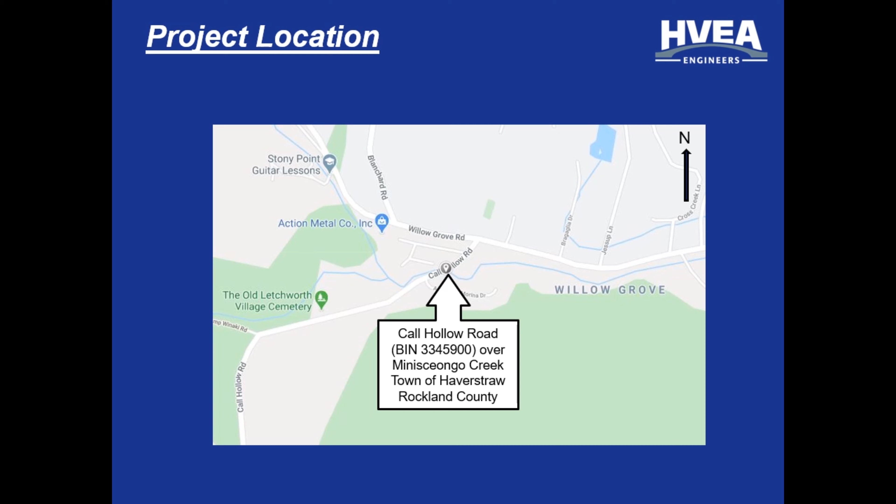As noted earlier, this bridge is located on Call Hollow Road between Anthony Marina Drive and Willow Grove Road. Here is a view of Call Hollow Road looking east toward Willow Grove Road. The bridge is located between the red lines under the roadway surface. Note the temporary concrete barrier that is protecting vehicles from the steep slope behind it. This barrier was added when the slope gave way and the existing guide rail collapsed.

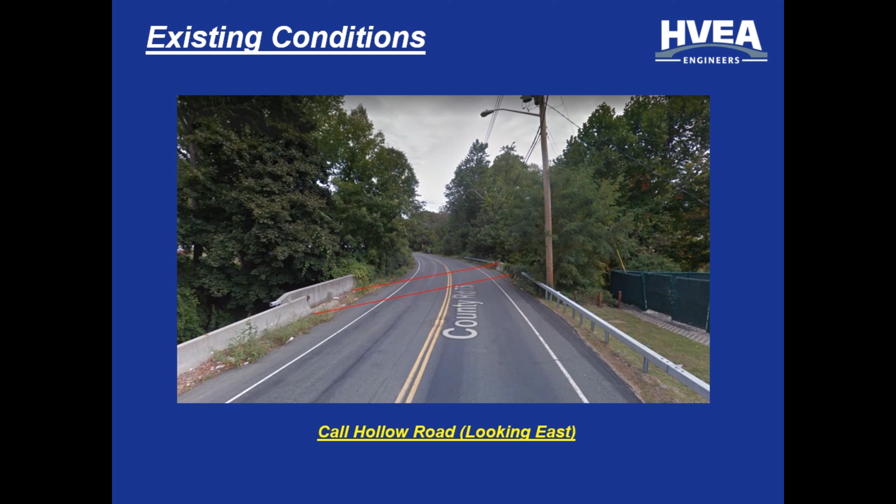Here is a view behind the temporary concrete barrier of the existing slope down to the creek.

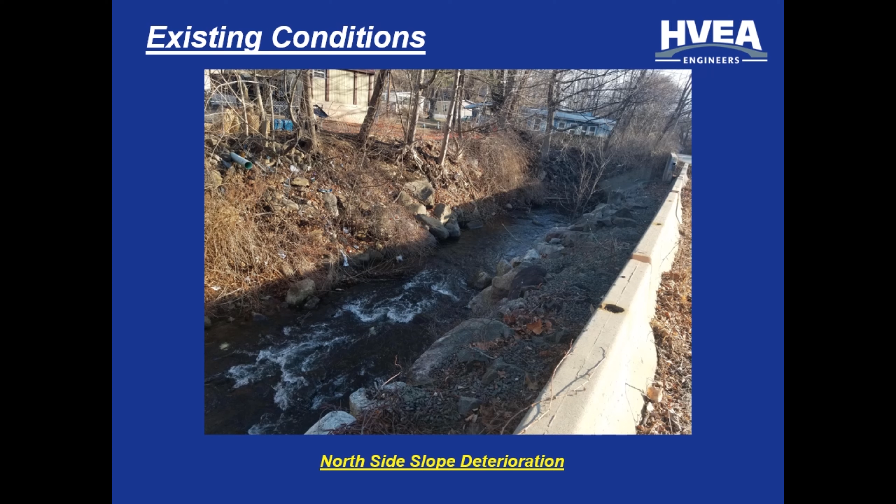Here is a view of the bridge on its north side, where water enters and crosses under Call Hollow Road. Silt and debris have collected in the first span over time. On a given day, water primarily flows through the second span until the water level reaches high enough to cross through the first span.

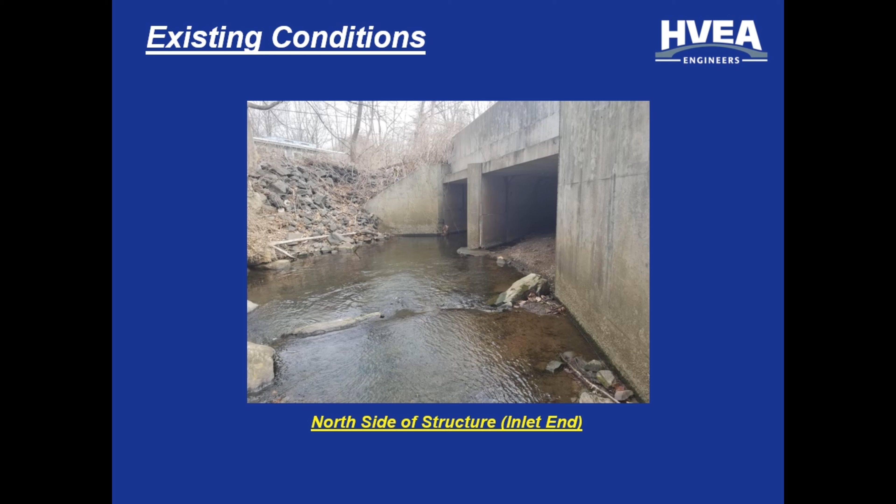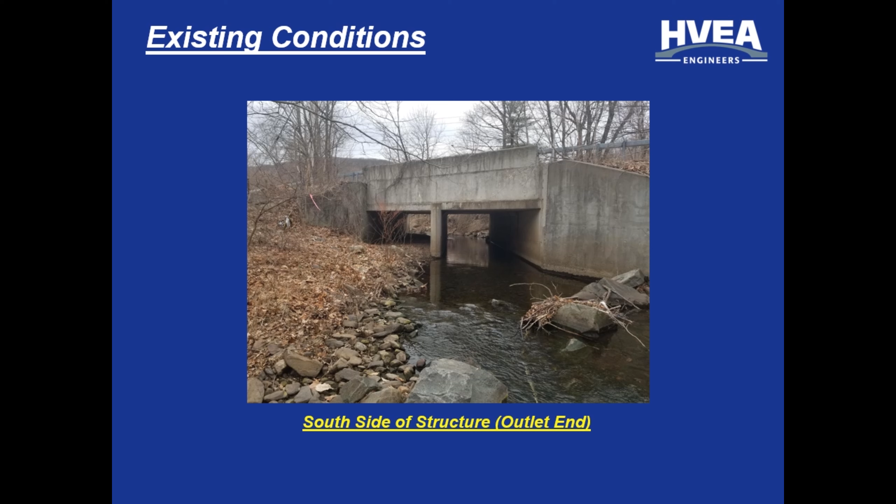Here is a view of the bridge on its south side, where water exits the bridge and continues on its way. You can better view the silt and debris that have collected in the first span from this vantage point.

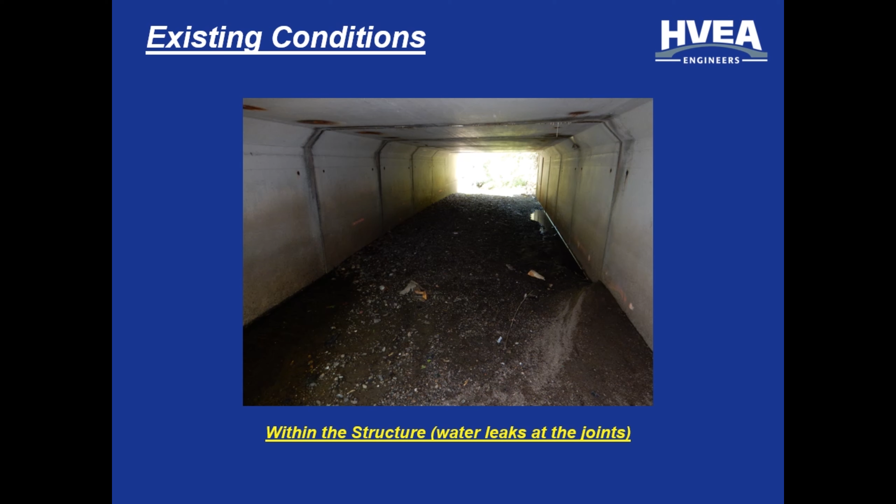Here is a view inside the structure. Note the water leakage at each joint in the structure. Here is a close-up view of typical concrete deterioration and exposed corroding reinforcement due to water leakage at the joints.

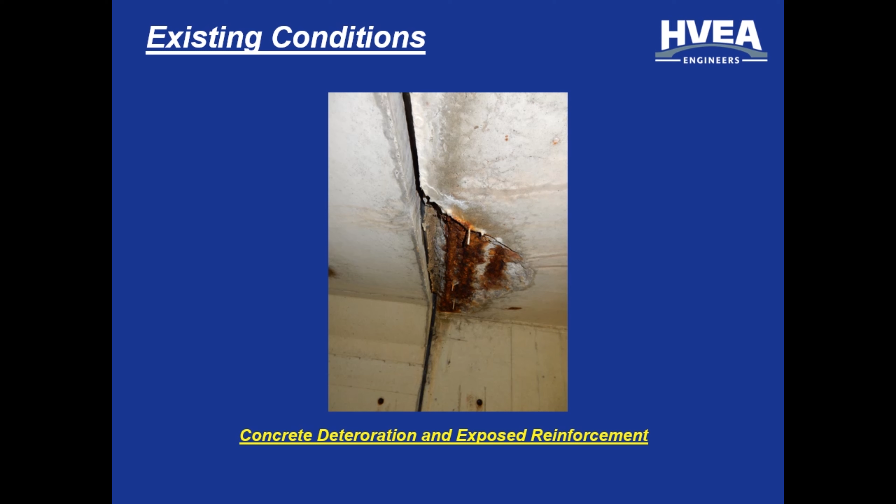This project came to be when the Rockland County Highway Department determined that the existing bridge is exhibiting signs of deterioration that require repair efforts beyond the capabilities of county maintenance forces. The bridge rates a 5 out of 7 overall per New York State guidelines. However, there are clear areas of concern, including spalling, exposed rebar, cracking and efflorescence, which indicates water leakage.

In addition, the northern slope along Call Hollow Road has been eroding away over time during large storm events. As noted earlier, the slope eventually gave way and the guide rail protecting vehicles collapsed. This required the county to install a temporary concrete barrier to protect the drop-off close to the edge of the roadway. This condition will be remedied with the installation of permanent wall and new guide rail.

The county applied for funding to rehabilitate the bridge and install a new wall through the Bridge New York program and received $808,051. Bridge New York is an initiative that is overseen by New York State DOT to provide municipalities with much-needed funding to repair or replace critical culverts and bridges. As a result of receiving Bridge New York funding, the project must adhere to all New York State DOT specifications and design manuals.

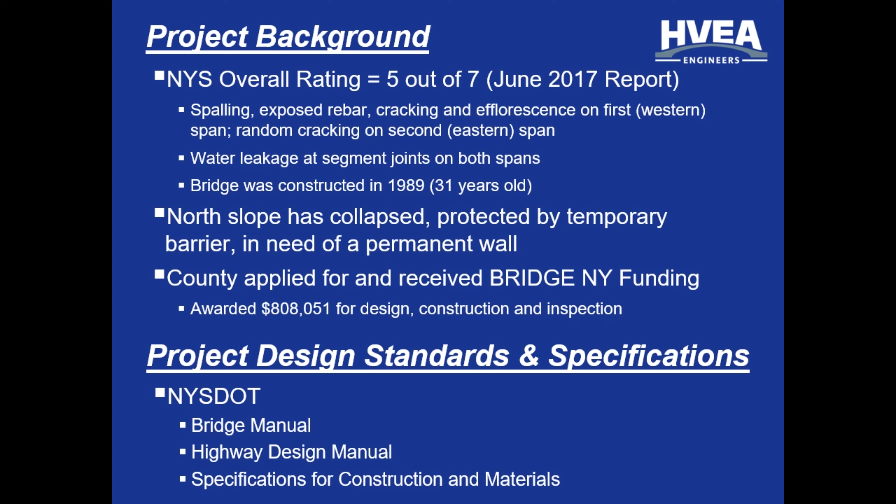The intention of the project is to rehabilitate the bridge in a cost-effective and timely manner. This will include removing and replacing the existing asphalt over the bridge, installing new waterproofing, repairing all joints, performing rebar and concrete repairs. The project will replace the eroding north slope with a permanent wall resistant to the effects of scour and undermining.

The project will reduce future maintenance and repair costs. Guide rail will be installed following the installation of the new wall to protect the traveling public.

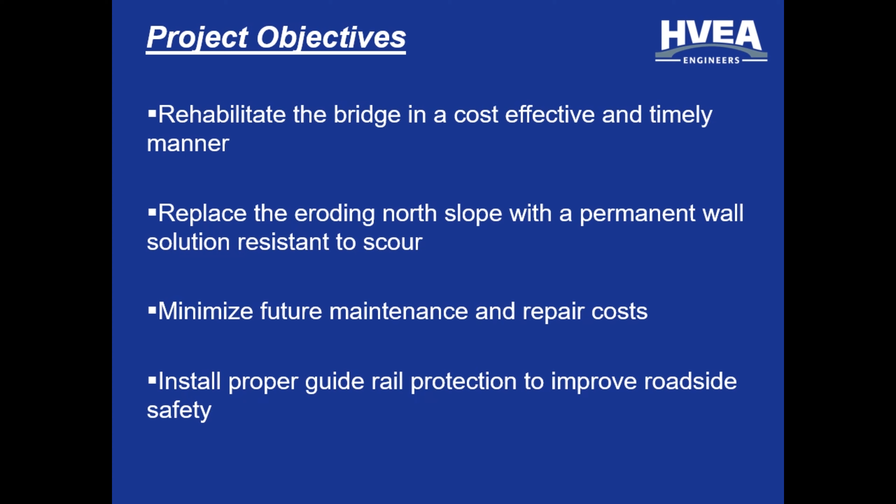The biggest challenge will be to complete the project in a timely fashion in order to minimize disruption to the residents and commuters that use Call Hollow Road every day. The most effective means of maintaining and protecting traffic will be to utilize a temporary signal that allows for one lane at a time to cross the bridge.

This condition will be in effect for a duration of approximately 3 to 4 months. Traffic will be on the south side of the road at first, then switch to the north side.

In order to properly install a new wall along the north slope, it will be necessary to excavate nearly half of the roadway down to the water level. This will allow for a stable foundation to be built below the water level to resist scour and undermining.

New clean fill will then be installed behind the wall, followed by a new pavement structure. The roadway will be protected with concrete barrier during these operations. It is also important to identify impacts to utilities early in design to avoid conflicts and delays during construction.

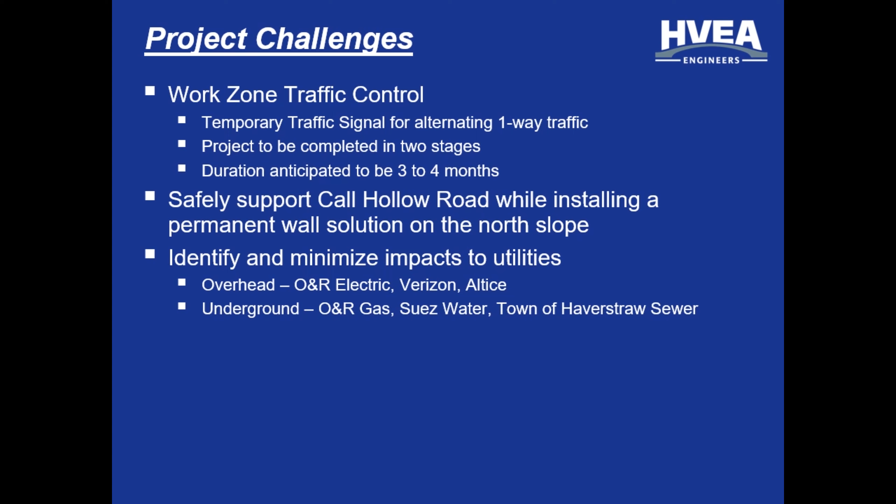HVEA is coordinating with all the listed agencies. To date, HVEA has performed several preliminary design tasks, from a topography survey to gathering existing utility information and soil properties. We have also performed environmental and cultural investigations to satisfy New York State DOT requirements.

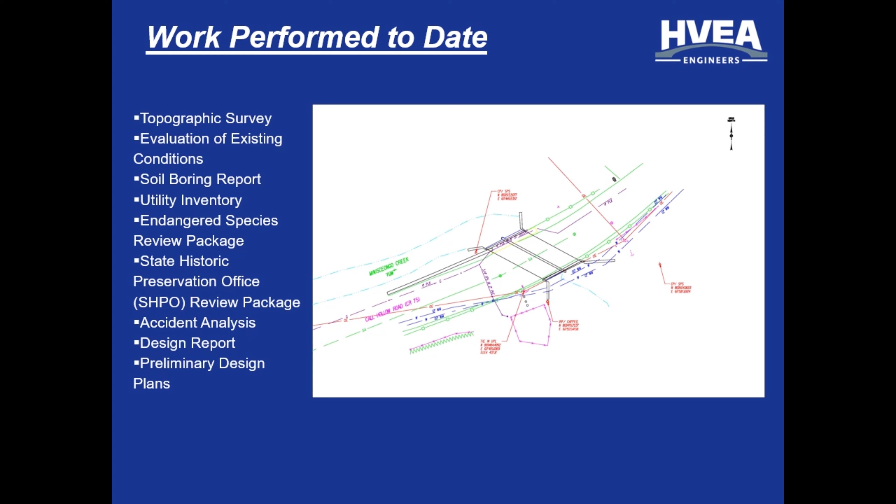All information has been gathered to form a design report. The most current version of the report may be viewed on our website, hveapc.com, from the link labeled Call Hollow Road Design Report.

Here is an excerpt from the plans of the bridge rehabilitation and new wall installation. The bridge is to the right of center on the slide. The new wall location can be seen as indicated in red.

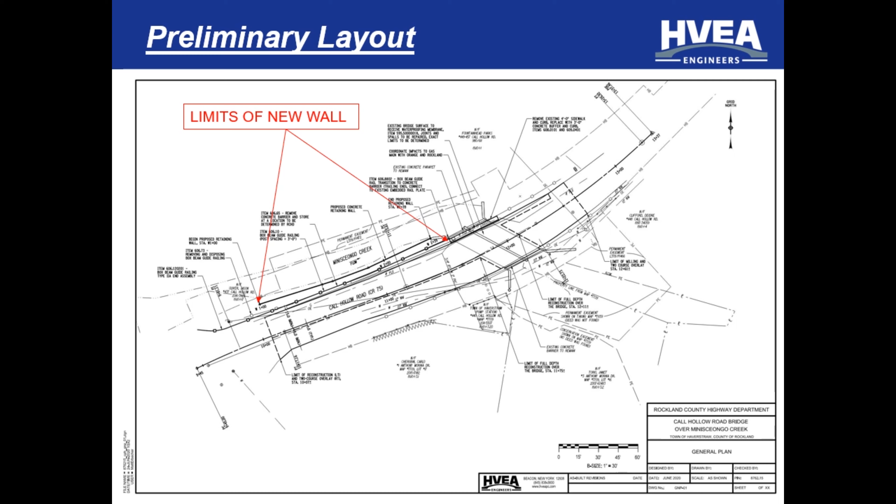In 2014, just over 2,000 cars used the road per day on average. This data is consistent with current day conditions.

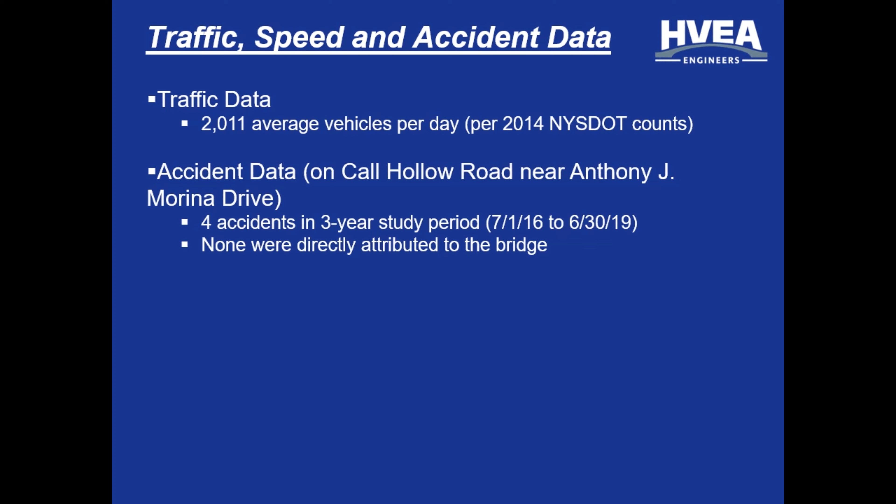We also obtained all available police accident reports in the vicinity of the project for a recent 3-year period to see if there are any accident problems associated with the bridge. While there were 4 accidents over 3 years over this stretch of roadway, none occurred at the bridge.

As noted, our next step will be to obtain approval to proceed with final design. Once we have had the opportunity to receive any comments or questions, we will compile the information into our final design report and obtain approval to move forward with the project.

As noted earlier, the county received $808,051 from the Bridge New York program. Of that amount, $170,000 is allotted for design efforts, $570,051 is allotted for construction, and $68,000 is allotted for inspection.

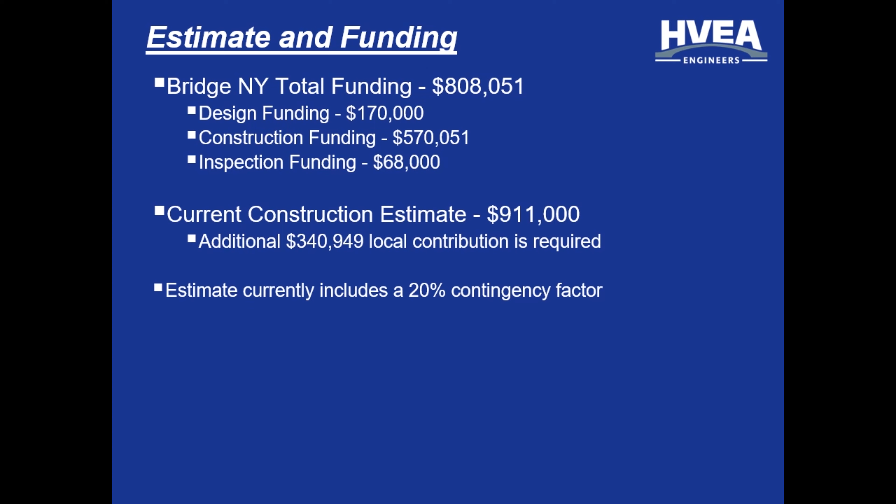The current construction estimate is $911,000, which means Rockland County will be responsible for the balance above and beyond the $570,051 construction funding. The estimate is subject to change and carries a 20% contingency factor, as we are still in preliminary design.

Once we have received public comment in mid-August, we expect to submit construction documents in early September and receive final approvals by the end of October.

The project is anticipated to be advertised for bids the week before Thanksgiving. Award of the project to the lowest responsible bidder is anticipated in mid-February. Construction will be completed sometime in 2021 and be done before the end of the year.

Please note that this construction project will be combined with 2 other projects concurrently being designed by HVEA. The 3 projects will be combined into one contract. The sequence of these projects has not yet been determined.

However, as noted throughout the presentation, this bridge rehabilitation is anticipated to take 3 to 4 months. Timing of construction will be publicized when available.